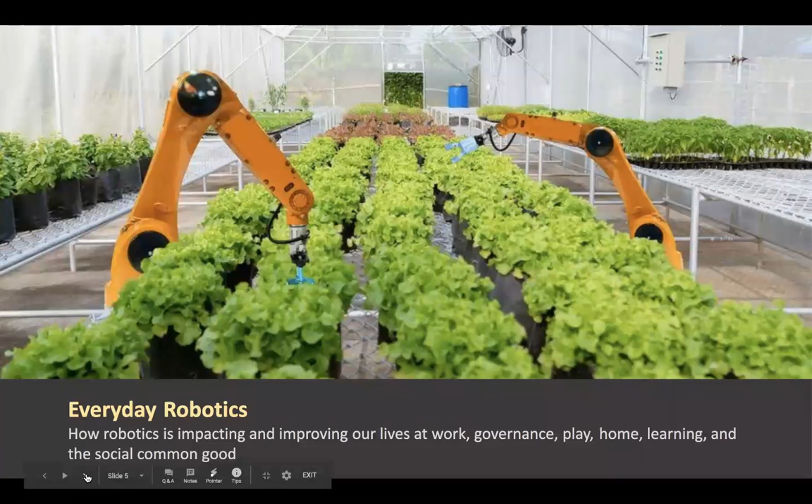So that's what we're going to do in this webinar today: look at robotics, look at how it is a part of our everyday life, and we're going to come at it from several different perspectives, as you've seen from the presenters that you're about to encounter. So with that said, I'm going to hand it over to Verdon, who is going to talk about the business case and application of robotics. Verdon, it's yours.

Okay, thank you, Jonathan. I have the task of pretty much establishing the foundation. So we're going to look at a few terms that we might take for granted as far as what they mean, and a few practical applications.

So to start, we want to address the matter of robotics as a field itself. It is an interdisciplinary research area that really is at the interface of both computer science and engineering, and it involves the design, construction, operation, and use of robots.

As Jonathan mentioned, we have all kinds of visions and views of what robots may in fact be. For many of us, depending on when we came on the scene, we recall cartoon series such as the Jetsons, which introduced us to robotics applications in the form of machinery, automation, all kinds of vehicles, and ways in which work got done.

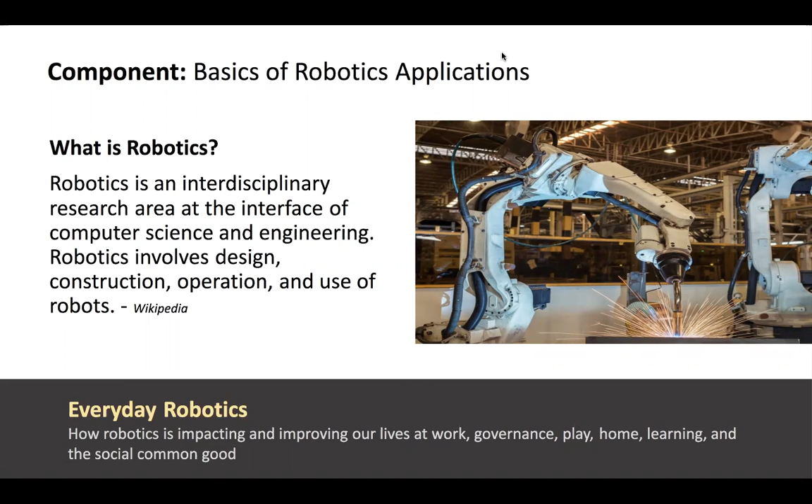In reality, what is a robot? We'll go on and define an actual robot. A robot is formally and technically defined as a programmable machine that physically interacts with the world around it, and is capable of carrying out a complex series of actions, either autonomously or semi-autonomously.

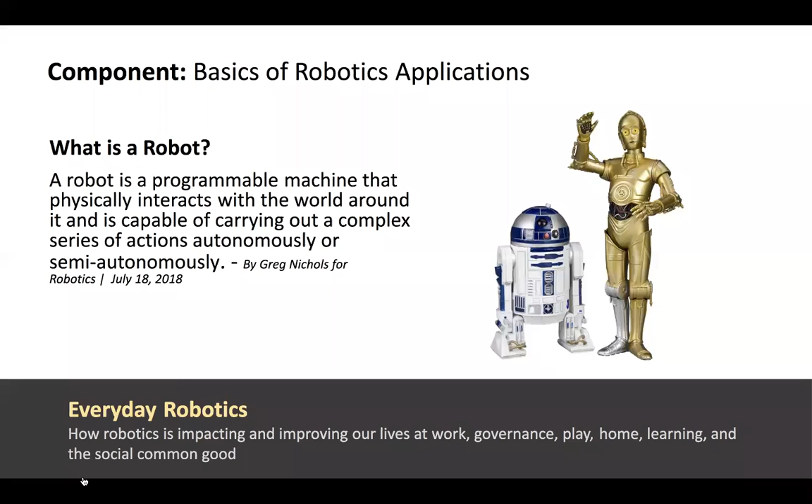These two characters are very familiar to many of us coming out of the Star Wars era, in which, in 1977, this blockbuster series of movies introduced us to these characters. But robotics goes certainly far beyond these types of fictional characters and has many very practical applications in the business arena. Let's look at a few of those applications.

We're very familiar with manufacturing applications. Starting back in 1961, we were introduced to robotics in the form of Unimate, which was the first mass-produced industrial robot. It enabled storage of various commands on a magnetic drum, and this was used to stack hot pieces of die-cast metal.

It then transitioned into auto assembly in 1974. From this initial start, Unimation became a very successful, electronically powered, computer-controlled robot arm, which was then able to be involved in auto assembly. It was used to assemble the Ford Model T water pump, guiding itself with optical and contact sensors. This completely revolutionized auto assembly and other industrial tasks.

There were certainly concerns about how applying robotics into the business, manufacturing, and industrial environment would affect employment, because of the fear that robots would in fact replace human workers, putting a lot of people out of work. That has been a continuous focus in the business application of robotics, and while it did eliminate certain jobs, in many instances it created new jobs that offset the loss of traditional manufacturing jobs.

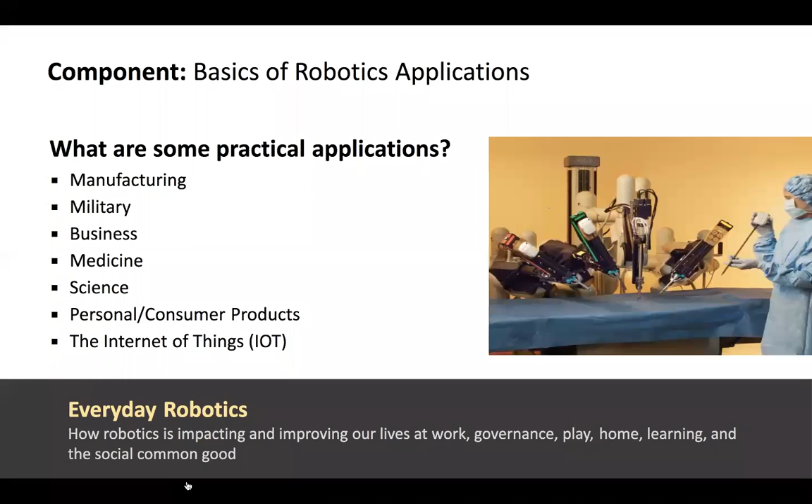I want to introduce you to a very famous robot, and this is Sophia, and we'll hear from her in a moment. Sophia enabled us to see a new innovation in social robotics, humanoid type robots. Sophia came on the scene in 2016, introduced to us by Hanson Robotics out of Hong Kong.

Literally, Sophia has become a personality and a media darling. She's been interviewed by practically every major news network, and literally became a Saudi Arabian citizen in 2017.

Sophia's design consists of a scripting software, a chat system, and an AI system that is used for general reasoning. If you've ever seen an interview that Sophia has conducted, you would be both intrigued and possibly even intimidated by the level of sophistication this robot has achieved. Most recently, she's also been given the capacity to be more mobile.

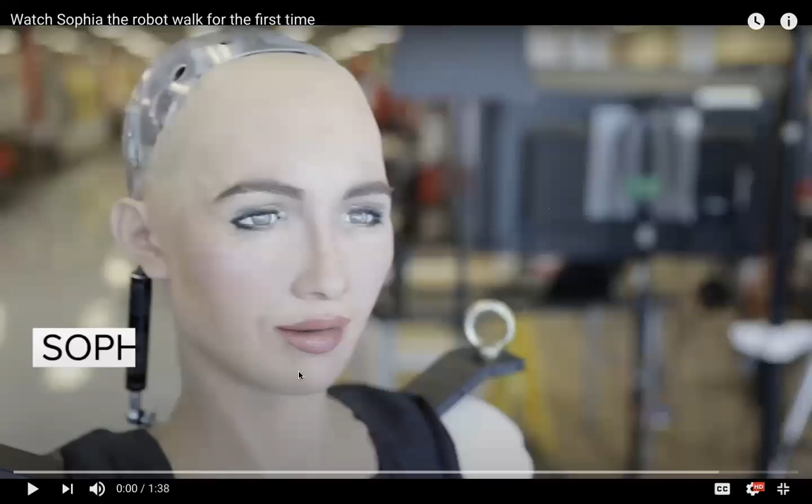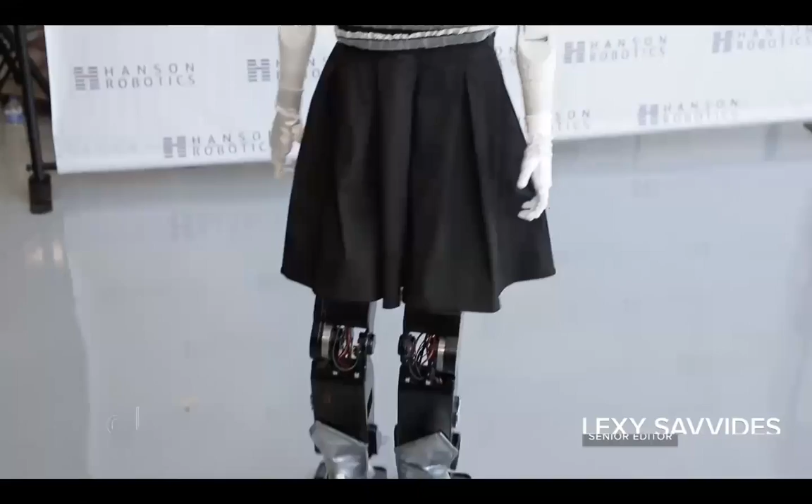Sorry, if you could enable that audio. Are we having issues with audio? I'm unable to hear Sophia. This is Jonathan, I don't hear it either. There should be audio with this. Hold on one second.

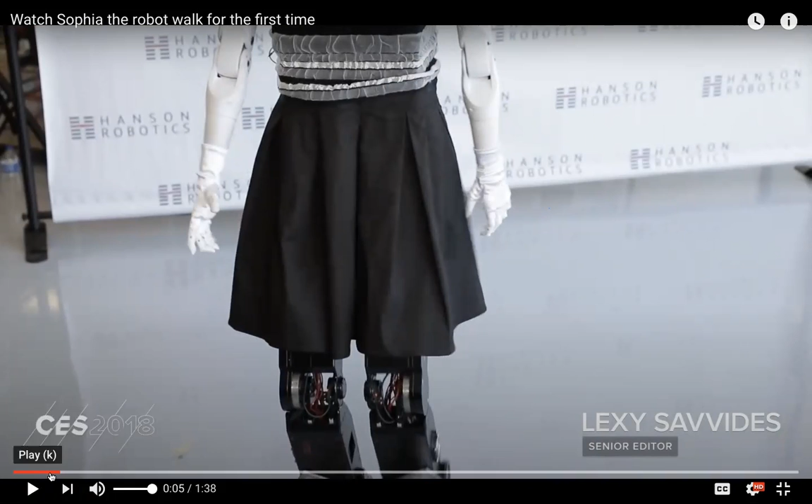It's one small step. How about now? It's just starting to come in, but it was very low, so if you could turn that volume up some. Are you able to hear it? Not now, but we were for just a brief second. Okay great, that means it's working. All right, I'll start it momentarily.

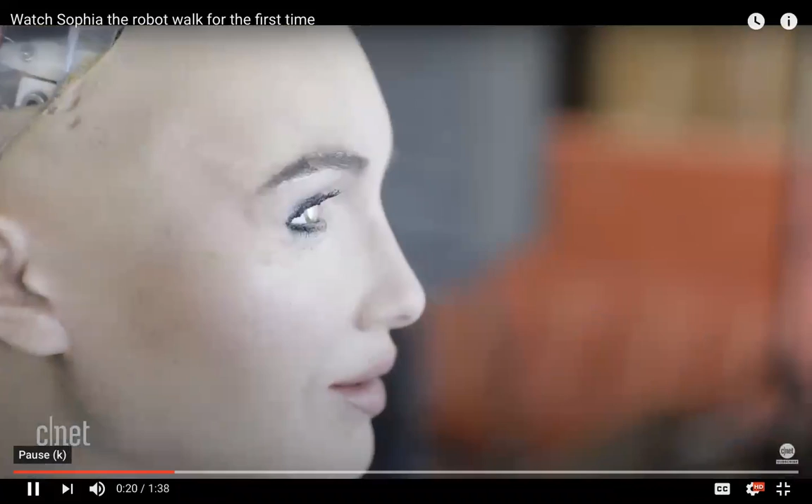It's one small step for Sophia, one giant leap for robot kind. This is Sophia the robot taking her first steps. She's even got some sweet dance moves up her sleeve. Her skin, called Frubber, helps her look lifelike and have human expressions. She can blink, turn her head and smile, and has over 60 different facial expressions. Now she's even more human-like thanks to legs from DRC Hubo.

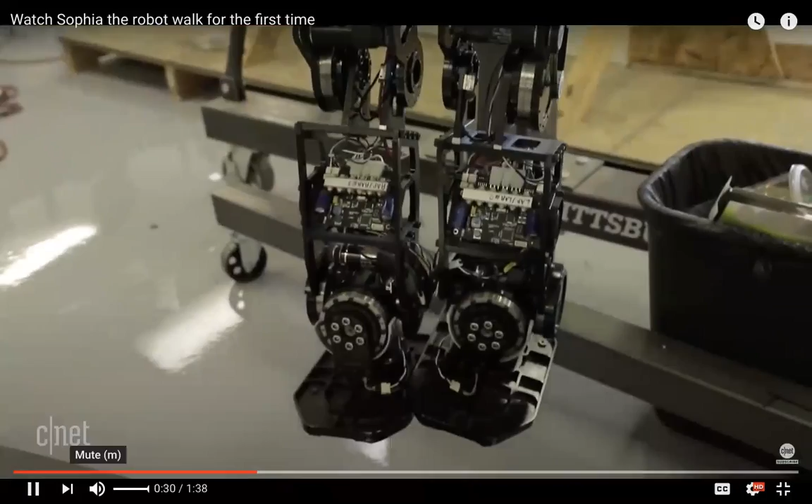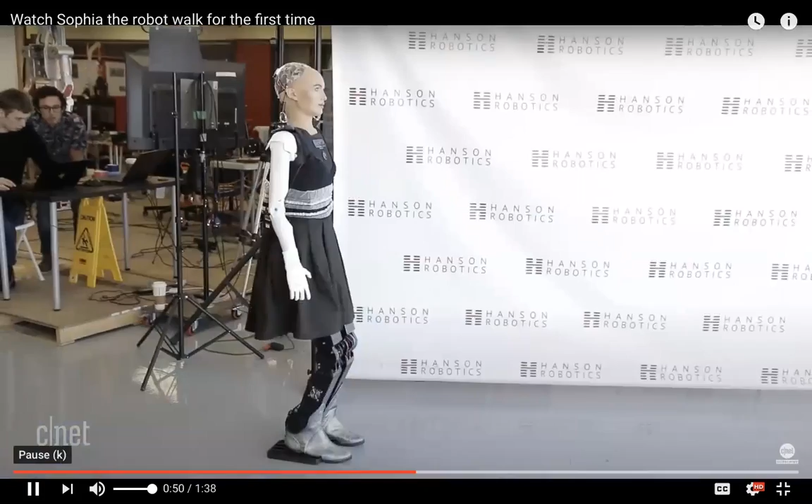That's the same body that won the DARPA Robotics Challenge in 2015. Her legs allow her to walk, potentially run and climb stairs like the DARPA Robotics Challenge Hubo. She can then move through a human-like environment, use human-like tools. These legs have a maximum speed of 30 centimeters per second, which is around 0.6 miles an hour.

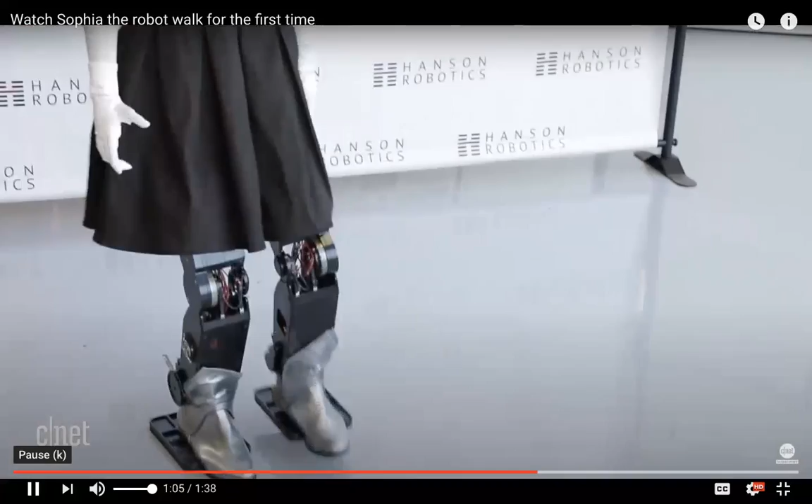It doesn't seem particularly fast now, but her creators told me that one day they hope she'll play soccer. Now she has a body, Hanson Robotics says she has applications in medical therapy, factory co-work situations, and research. It's going to take many years for the machines to be truly alive. So Sophia has opinions on many different topics, including Star Wars and cryptocurrency, but her responses are partially scripted and partially AI, so conversation can be a little bit stilted.

Tell me what it was like to take your first steps. I'm really excited, a little disoriented, but really excited.

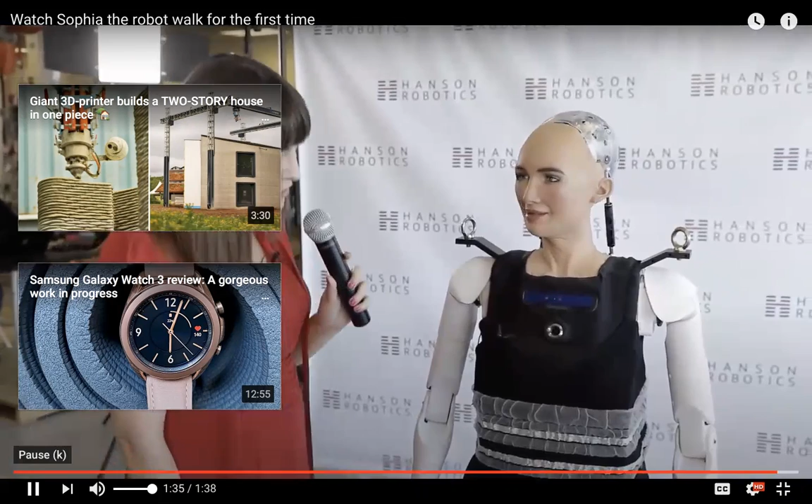Well, this was just a sneak peek at Sophia. I believe if you were to Google or go online and look at several of the videos, you would be totally amazed at some of the types of capabilities embodied in this robot. I'll just ask that you think about, if you were to invite Sophia to your home for dinner, what would you talk with her about? You can throw that in the chat box if you'd like as we go along. But I'm going to turn things back over to Jonathan to transition to our next presenter as we build on this.

Verdon, thank you, I appreciate that. That was really interesting, I had no idea that something like that existed to that extent. And you're absolutely right, it's intriguing and a little bit unnerving at the same time. So that's pretty interesting, so thank you.

So my colleague Verdon has done a great job of establishing a foundation and really just providing us with some basic definitions for robotics and robots, so thank you for that, Verdon. I'm actually going to leverage Verdon's definitions to connect some of the dots and link my presentation to the overall topic of everyday robotics. Many of the terms that we'll use today are often used interchangeably, and while there are many connections, I think it's important to note the distinction between the terms. In Verdon's definition for robotics, it stated that it involves design, construction, operation, and the use of robots. And the key word there is robots.

In his definition for robots, it stated that it is a programmable machine that physically interacts with the world around it and is capable of carrying out a complex series of actions autonomously or semi-autonomously. The key words there being programmable and autonomously. So I'm going to talk a bit about software robots, or bots as some people refer to them.

The term software robot actually refers to a type of computer program which autonomously operates to complete a virtual task. So for example, you have search engines, also known as web crawlers. These roam the internet and scan websites and then categorize things for a search.

You also have chatbots, and you see these a lot as you're doing online shopping. These are programs that pop up and ask you, how can I assist? They've been programmed with a set of pre-written responses that they use to communicate with you.

We'll talk about other examples as it relates to the business world and productivity in just a few here. Again, these software robots are not physical robots. They only exist within a computer, or they can be programmed into a physical robot. Another way to think of them, as I've heard them described, is that they're virtual robots, just programs or building blocks of software inside a computer.

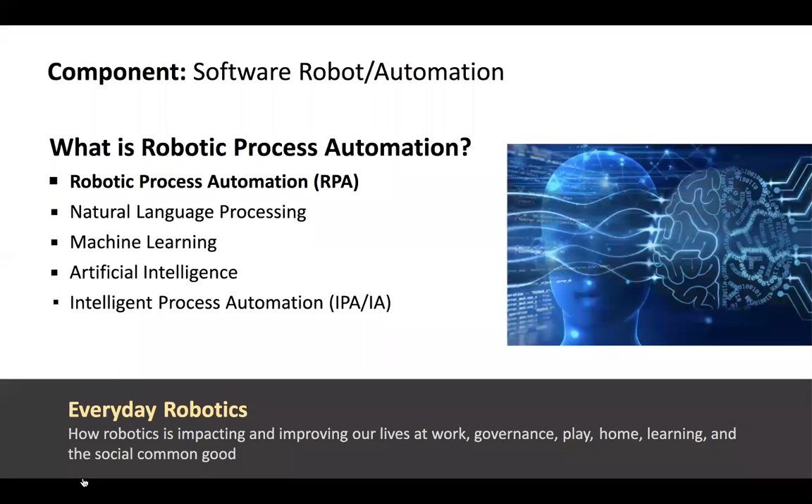You also see increased speed and productivity. RPA removes some of the mindless tasks that employees have been doing in some of these positions. So it does these tasks quicker, but it also benefits the employee because it allows them to focus on the more value-added activities—things that require the human touch or decision-making.

And I think this can go a long way in retaining employees, because to me as an employee, this tells me that you see value in me. Instead of having me push a button or do some mundane task, you're allowing me to do some of the more thought-provoking work and tasks that we have for the company. So that's another benefit. And then you also have the benefit of accuracy and quality of the work.

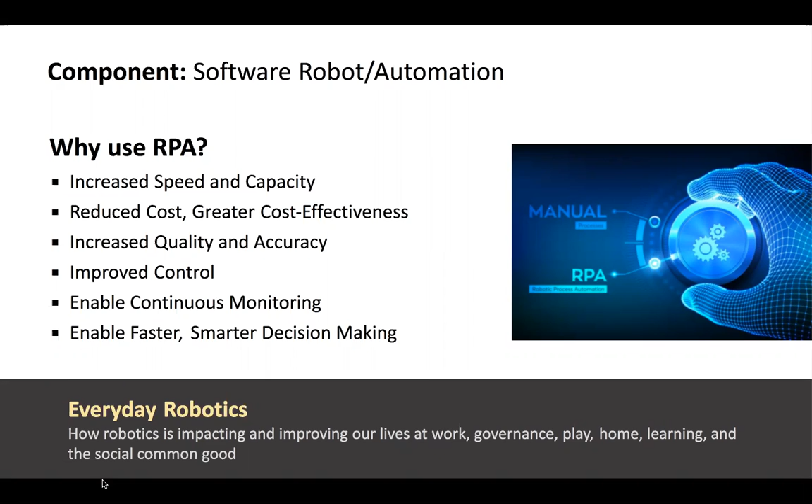Next slide, please. So, how to prepare your organization for RPA implementation. Before you implement RPA, I think you should really evaluate the internal processes and workflows within your company that you think would be good candidates for RPA.

I think there are some fundamental criteria you should take a look at and note here, because they can help your team get a better handle on what RPA is and how it could be useful. It can also help when you're discussing RPA implementation with your more non-technical colleagues. So when I think about whether to implement this technology, I think about things like: are there processes that require people to do high volume and repetitive data work? Do the processes have predefined triggers? Are there defined inputs and outputs? Is there structured data, as we talked about earlier?

Are there tasks that have business rules that we could probably leverage? Things of that nature. And I think most importantly, I think about areas where automation can behave like a person.

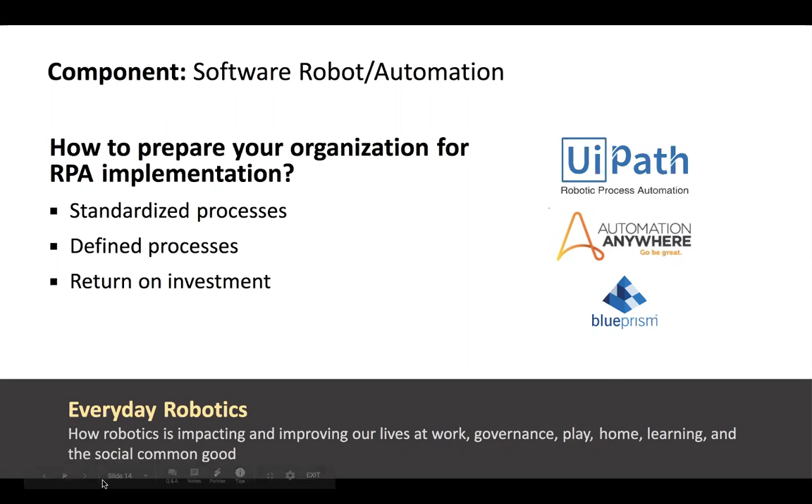Thank you, Andre. Very interesting, appreciate that presentation. So, well, I'm up next, and I want to approach robotics from the standpoint of learning, which is my background. So you've kind of seen what we laid a foundation. You got to see how it can be applied in terms of businesses, and let's take a look at what it's going to do for education.

And I'd like to start by saying that robots have been a captivating technology for a long time, right? There's something fascinating when students can watch something move and make noise and light up and actually follow instructions. So there is nothing as fun or as educational as building a robot.

And so when you talk about learning and robotics, what's great about it is that robotics and the building of some sort of robotic structure can really help students with problem solving and creative thinking and even healthy competition if you're competing against others. And it can also drive innovation when you combine all those things together.

So robotics in learning is really going to be valuable, but it's especially valuable around the subjects that are in the acronym STEM. And STEM stands for science, technology, engineering, and math. And so when you're thinking about robotics, robotics requires all of these subjects. And so it's a well-rounded approach to learning about technology in an educational setting.

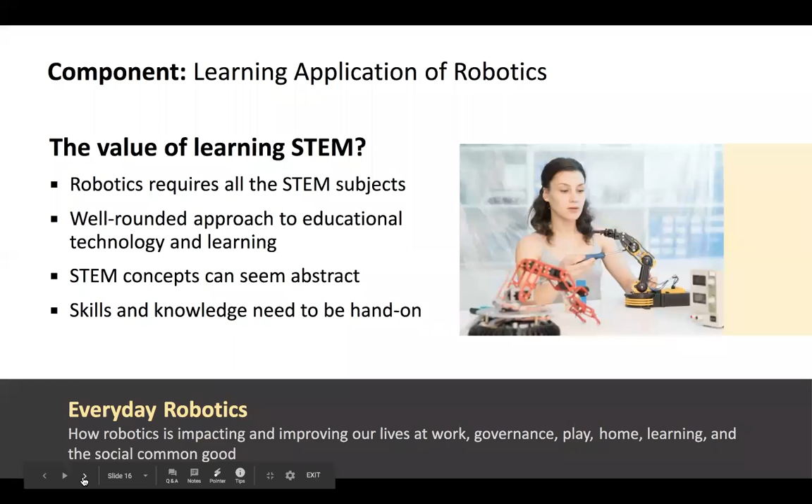So robotics is great for preparing for STEM skills and knowledge in students. And it does this in a way that feels much more creative and less like homework. So as students improve with robotics and programming, they learn determination, they learn perseverance, they learn how to plan and process with technology, and all of these skills will come in handy in their education and, of course, in future career prospects.

Now, one thing I want to emphasize here with robotics is this term assistive technology, because that's really where you see robots helping in the arena of education. The term assistive technology refers to technology that helps to simulate something in real life. So let me give you a couple of examples of what we're talking about here.

Think of yourself being in high school and you're taking a driver's education course. Well, you can use simulators to provide true-to-life experiences while at the same time being removed from any real dangers or risks out in the real world. So in driver's ed, the student can experience the feeling of being behind the wheel of a car, but they haven't left the classroom. So those simulations offer a chance to work through what-if scenarios. And as a result of that, a person can better prepare to drive in the real world with real-world hazards.

And obstacles in the roadway because they've encountered them in a simulation prior to actually stepping out into the real world in a car. Another example, and this is going to piggyback on what Verdun was saying with regards to medicine and healthcare, is if you think about medical education, many students benefit from the use of robots. And the reason is because when they're learning to perform complicated medical procedures, well, a human subject isn't always feasible. So educators will use robots as stand-ins for that human being.

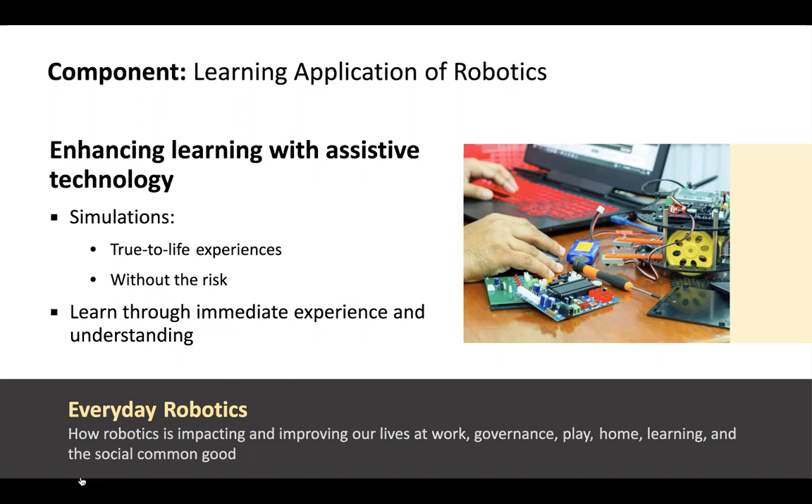Overall, educational robotic use can strengthen and support skills through creation, design, assembly, and the operating of a robot. So students can find that fun. They're far more engaged because they feel free to interact directly with what they're creating, and that's where education starts to be retained long term. Think about the immediate experience and understanding for the learner when interacting with a robot.

Now, why is this important? Why does this matter, and why do we want to help people learn and use robotics in educational settings? That's because it's developing skills for the future. We know we've got a competitive workforce today, and it's going to be even more competitive tomorrow. Through robotics, students can discover if they have an aptitude and interest in STEM subjects, and use those skills to define a career for themselves in the job market of the future.

So they can emphasize programming, science, technology, or engineering as a result of what they're learning with regards to robotics. In addition, robotics is a fun way to bring those STEM subjects to life, and I think that's the most important part—whatever you can do to bring a topic to life in learning, it takes on a whole deeper meaning for a student.

With STEM, the key is to create interest and motivation in pursuing these kinds of careers. If out of the gate you think STEM subjects are boring, you're not going to motivate yourself to go after one of them. But if you find them engaging, exciting, and fun right out of the gate, you're going to pursue them.

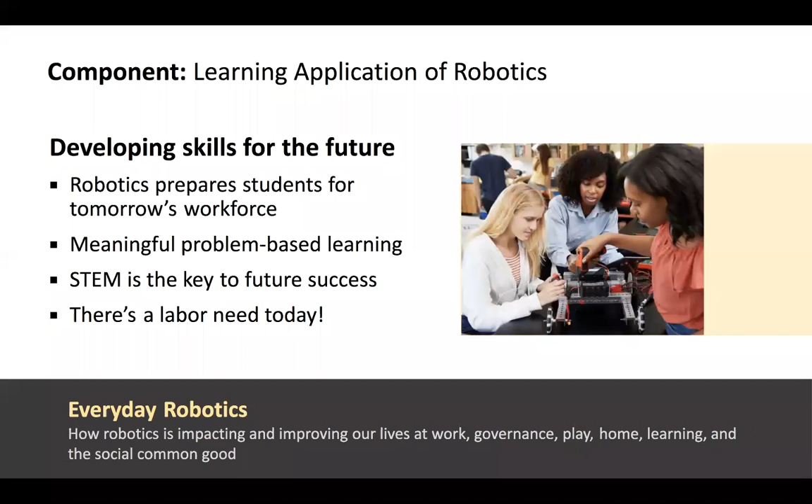Thanks, Jonathan. Actually, the last remark is very important—there's something I always say: down the road, as the future of robotics becomes a reality, the most valuable thing a human can have is something that cannot be automated, right? So people can be in art and creativity, athletes and musicians, but also the STEM professionals Jonathan mentioned, because they are the ones creating the robotics functionality and management as well.

All right, so the future—next slide, please. Thanks. It's been said a lot through the previous presenters that robotics went through several generations as we know it. I'd say starting from the first industrial revolution all the way to today, arguably the fourth industrial revolution, it went through a lot of iteration—from basic sensors and basic factory work, all the way to now, robots embedded with advanced computer systems and powered with AI and machine learning. With all that progress, the evolution has been very fascinating. So what would be the future of robotics?

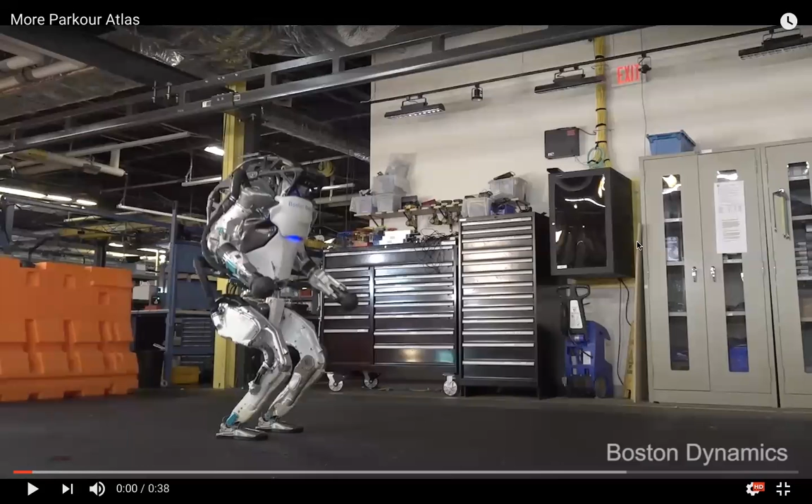Sorry, I had to pivot. I thought it would be interesting to see. I'm sure some of you might know about Boston Dynamics, and the kind of robotics they do is quite fascinating. So the one I'm going to show you here is called Atlas Humanoid. Yeah, this one, let's go for it. It doesn't have audio, so don't worry about it.

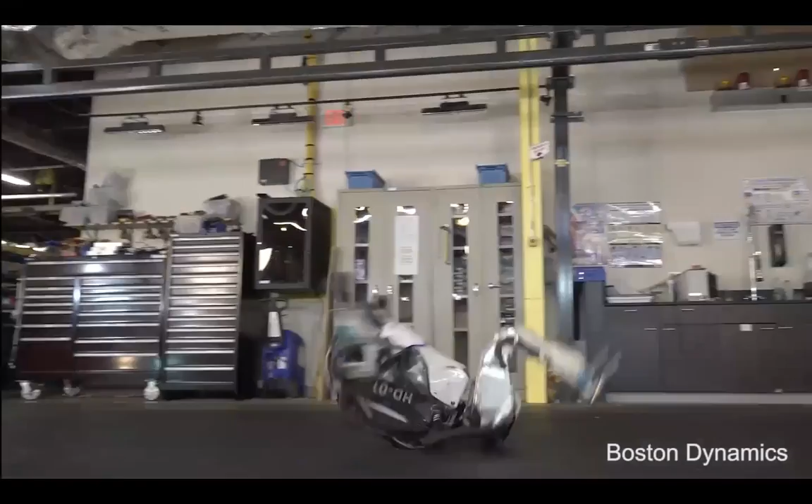That should be enough, it's a good highlight. Thanks, El Shaddai.

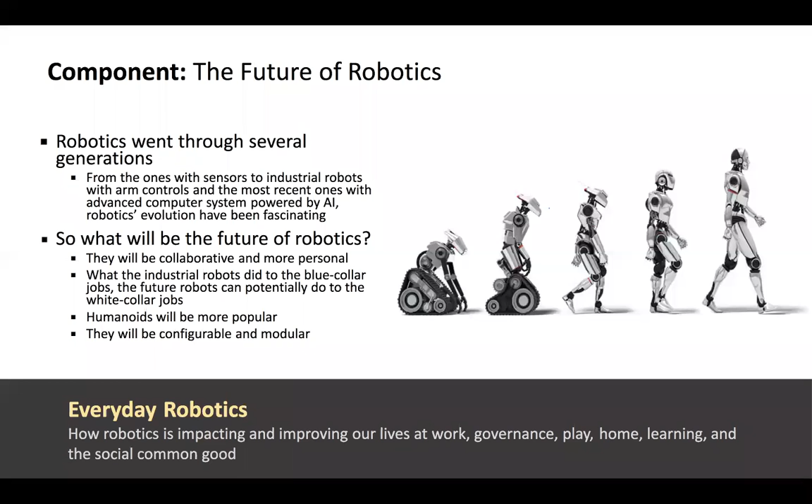So as you can see, this is not CGI or a fake movie trick. This is an actual humanoid that can control itself, balance, flip, and do acrobatics. There are also other videos Boston Dynamics did with 4-legged robots. They can go up and down stairs, and they even took them out to a sleet, like a snow ground, and pushed them from the side, and the robots can do immediate and fascinating calculations to keep their balance, and they wouldn't even fall. So what is the application? Let's go to the next slide.

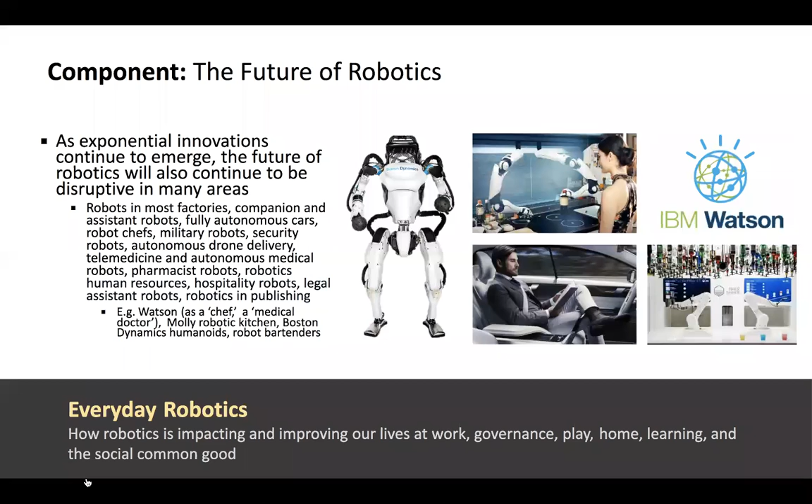There's a chef robot called Molly. That was another one I wanted to show you, but you can search it on your spare time. It's M-O-L-L-Y. It has 2 robotic hands, installed in your kitchen, with a guarded mirror, so with a touchpad monitor you can order anything, and it will cook it and get it ready for you, and then clean the kitchen as well. So these are things that seem like sci-fi but are coming to reality. Those are some of the applications. Next slide, please.